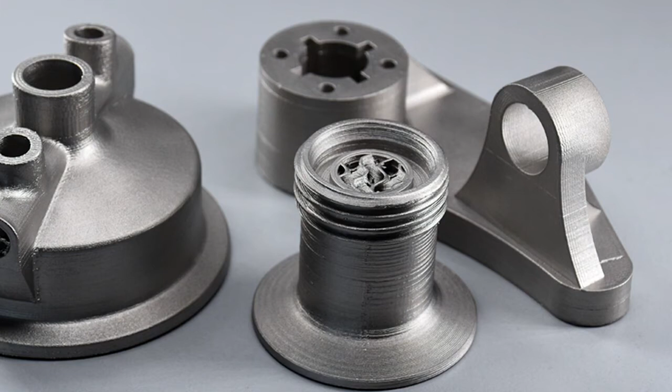Okay, now we're going to talk about our fourth module, which is simulation. I'm here with my services colleague, Dr. Daniel Leutz, and we're going to talk about brown part stability, orientation, and sintering simulation.

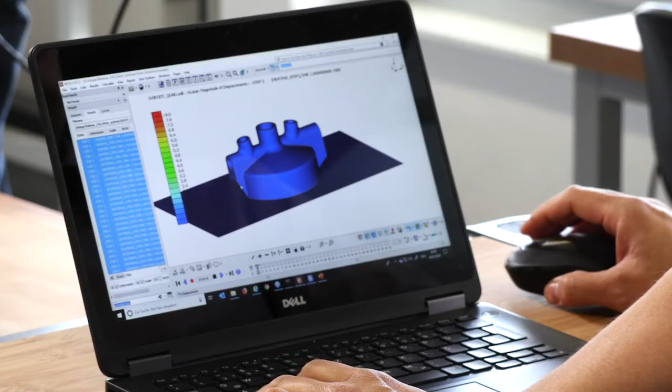Hi James. As James already mentioned, I'm from the service team. We are supporting our colleagues from the metal filament. What we offer is that we are simulating those filaments in the different processing stages.

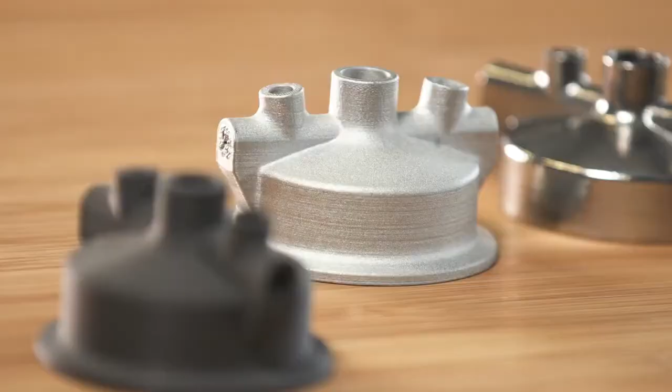First is debinding simulation, checking the brown part stability. The brown part is quite fragile during debinding, and it could collapse under its own weight. Like we saw in this one, where we wanted to minimize print time through using less support, but we ran into that danger zone where you start getting cracks. That's when we bring a complicated part, or sometimes even a simple part, to Daniel here to simulate and inform us how to make the design ready.

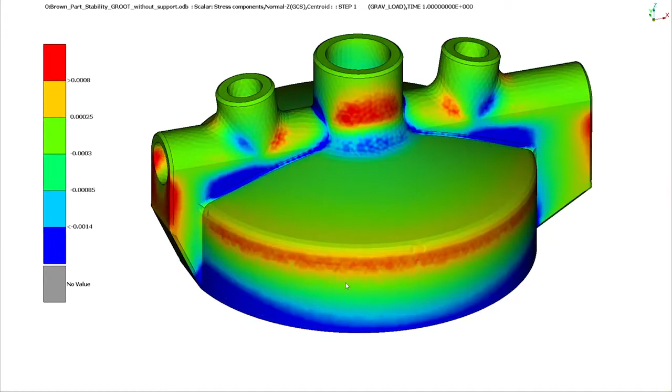If we look at the simulation of that part, which was printed without support and debound without support, you can see that some critical stresses will occur. So like we see here, it will fail.

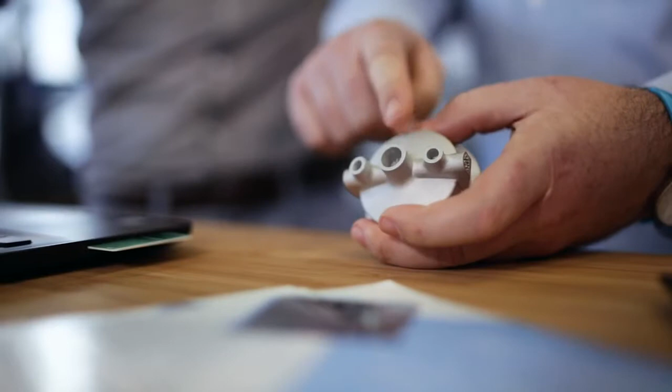But on the other side, as we simulate that with support, as we did here, you can see that the stresses are much lower, so the survivability of that part is much better. It also informed us to add other features like a larger lip on the bottom, used mostly for fixturing, but also to provide more adhesion to the bed while printing. We were having a little bit of warpage and things like that, and those are situations where it can assist us to fine-tune our parts to really make them ready to go.

Yeah, definitely. I can help and support you and also the customers. But for customers who have the ability to do their own simulation, we have a white paper now on the homepage which can be downloaded to explain the steps to perform such a stability analysis for the brown parts. And rest at ease, this isn't some super complicated thing that takes a doctor to do it. It works on SolidWorks or Inventor or NX CAM. Most regular CAD softwares do have simple simulation systems, so there's a gravitational simulation just to show the problem areas, the critical stresses on where your part can fail. That can inform you to iterate your design to have it most confident for surviving the debinding and sintering process.

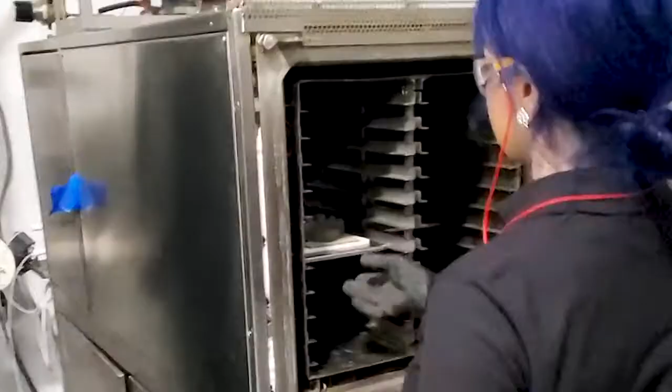Based on that simulation, what we also offer is an orientation optimization. It's obvious for that part how you place it in the debinding oven, but it could be that you have some more complex parts where it's not obvious which is the perfect orientation. In some orientations, the part might fail; in others, the part will survive. So we have an optimization method which determines the perfect orientation with the highest survivability of the part.

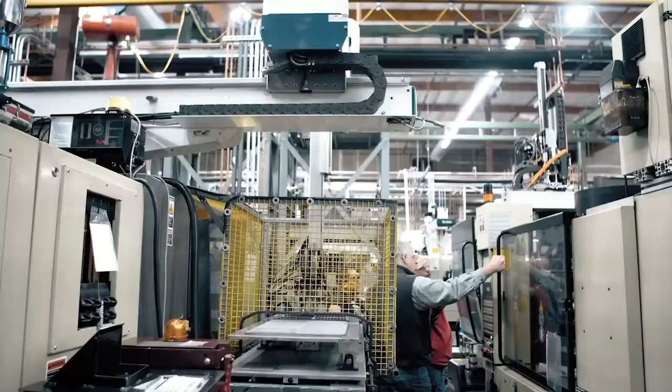One thing we often see is that you're getting parts that aren't designed for additive yet, not thinking additive like we talked about in our design guide section. Often they're adapted from CNC milling or injection molding or any other manufacturing process. So being confident that you're printing in the right orientation for the part you need is very critical. That can enable, through our orientation simulations and brown part stability, to make sure you're getting the first part right. Good practices leading up to the actual debinding and sintering are critical.

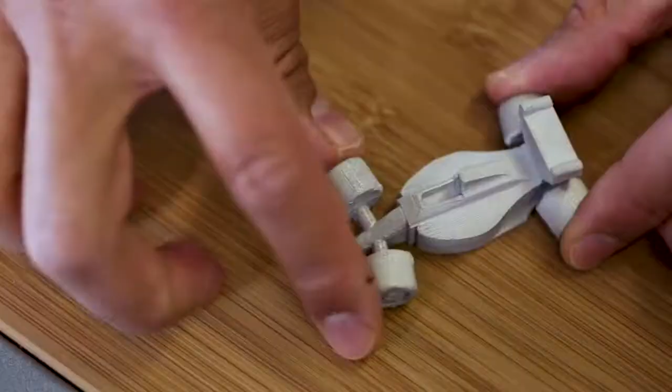Yes, and we've got a third part, which you also mentioned, the sinter simulation. I would say sintering is the most critical and most complex part of the whole process. As you said before, during sintering we have a high anisotropic shrinkage. If it's a symmetric part, it often shrinks homogeneously. But if you have a more complex part, something like that, you can see how the tires are aligned, you also get some warpage. Here we have set up a unique sinter simulation which predicts the shrinkage and also the warpage.

As you can see here for your part, and see how it shrinks, we also have some warpage in there. When you have a part that's going to end up curved like that, we enable you to print it where it's going to be. You're kind of shooting for where the target will be when it's sintering. So it might look a little strange, like it's too far this way, but we know it's going to rest down to where it needs to be. It doesn't really matter what a part looks like off the printer; it matters when it's metal.

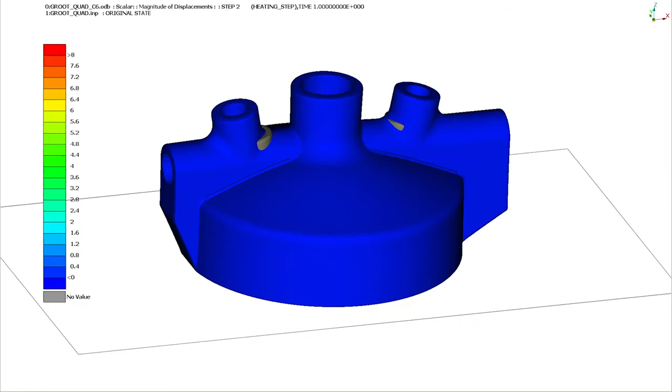And for that, we have the Sinter Optimization. This means we can predict, based on the sinter simulation, how your green part needs to be printed such that at the end it will shrink and warp to the desired geometry. You can see it here - now we have a different green part, but it sinters to the right geometry. This is a service we are also offering to our customers, but this is done by us. So approach us, and we can help you with the sinter simulation and also optimizing your part for near net shape.

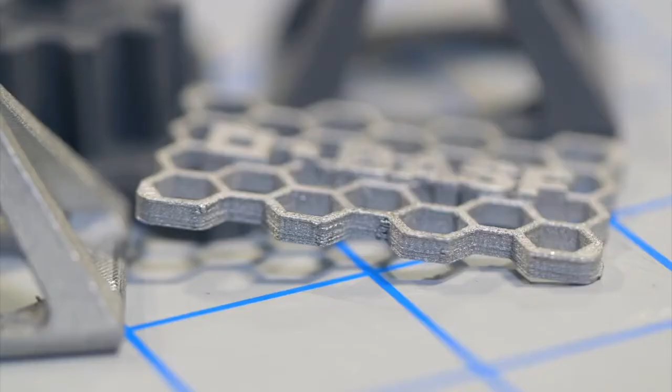And this is how we're pushing the technology literally to the limits. Through using these simulations, through using orientation simulation, we're able to print and produce parts that were unimaginable years ago, even within the metal filaments group. So we really want to appreciate the work from our colleagues in services, and to get you the part that you need.